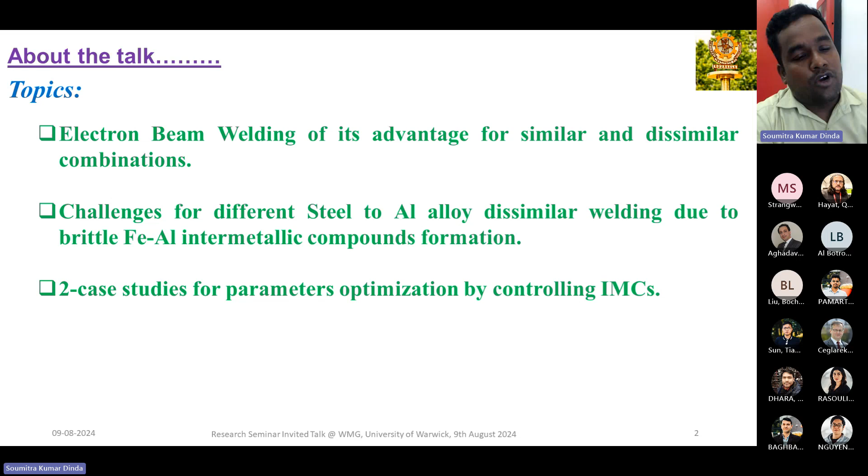Regarding the topic of today's talk, first I will start with electron beam welding fundamentals, its advantages for similar and dissimilar combinations, and the challenges for different steel to aluminum alloy welding. Then we will discuss those challenges in two case studies for optimizing the parameters in terms of controlling the intermetallics, for getting the optimum condition from a mechanical properties point of view.

The agenda of today's presentation is divided into 4 parts. First, I will talk about myself and my present institute, taking around 4 to 5 minutes. Then I will introduce the electron beam welding system with the help of the iron aluminum phase diagram, taking around 10 minutes. Then I will discuss two case studies: first, Fe 7% aluminum alloy to mild steel, and second, DP 600 steel to 5754 aluminum alloy, each taking within 15 minutes.

Regarding me, I am currently associated with the National Institute of Technology, Rourkela, joined as assistant professor in the Department of Metallurgical and Materials Engineering. Before joining here, my whole degree was in Metallurgical and Materials Engineering, starting with my Bachelor of Engineering from Jadavpur University, then Master of Technology from IIT Kharagpur, and PhD from IIT Kharagpur in collaboration with WMG.

My co-supervisor from WMG was Dr. Prakash Srirangam. After finishing my PhD at the end of 2019, around November, I moved to Toronto, Canada, joined as a postdoctoral fellow in the materials engineering department. I stayed there more than 3 years and came back to India at the end of April 2023, joining here as assistant professor at NIT Rourkela.

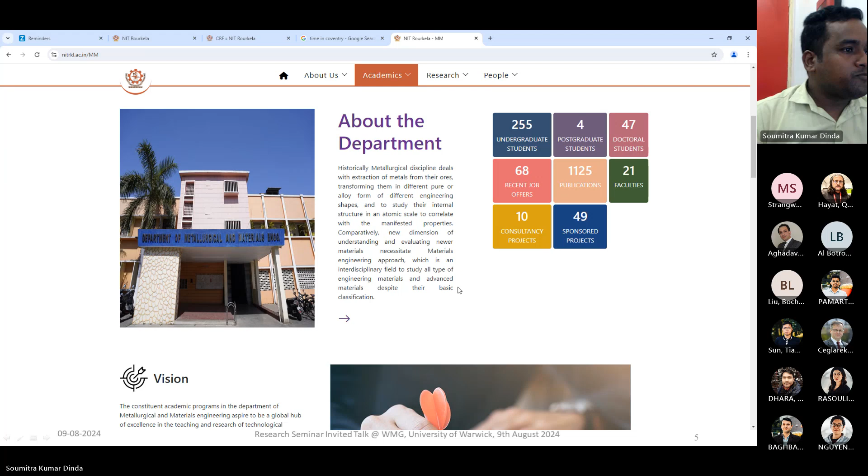With conventional characterization techniques, we also have AFM, EBSD, TEM, confocal microscopy, and secondary ion mass spectroscopy. These things are available as a central resource, meaning anytime we can book a slot and do the experiment.

But if you see our departmental facility, in our metallurgical engineering department we have a lot of experimental and computational facilities in terms of microscopy - confocal, AFM, TEM, and scanning probe microscopes are available. Some of these facilities I am in charge of, or other professors are in charge of in that system.

Suppose the computing facility - I'm in charge because I'm working on the computational or CFD part. So we have ANSYS, MATLAB, Abaqus subscription, and also an HPC system. HPC means high performance computing system.

I have two clusters with a very good configuration of 128 GB RAM with 10 terabytes hard drive, because if you use ANSYS or MATLAB, we need a high configuration computer to do the simulation work

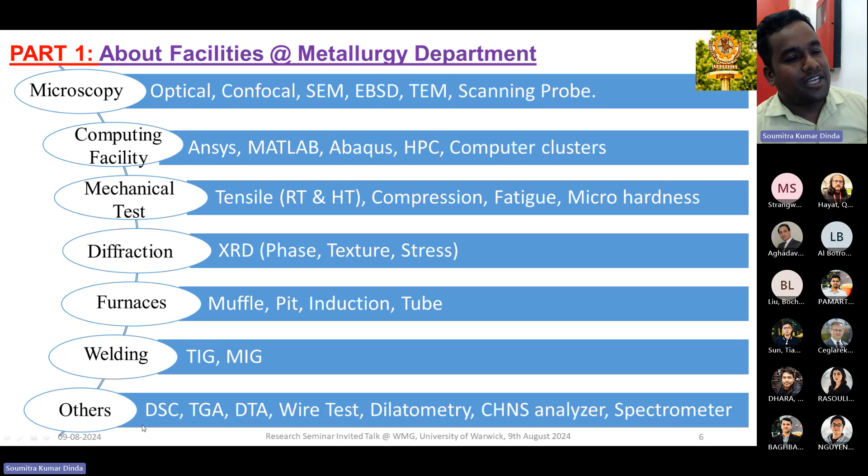That's why I contacted Professor Derek and Professor Pascal so that we can collaboratively do some work - other characterizations like DSC, TGA, DTA, wear test, dilatometry, CHNS analyzer, or spectrometer.

So let's move to part 2. Part 2 is related to our electron beam welding. Before going to electron beam welding, this graph is well known, and I think everybody knows it.

That is heat input versus power density variation among different welding processes. In comparison with gas welding and arc welding processes, the high energy beam density welding like laser beam welding and electron beam welding has quite low heat input, but very high power density.

So that means in case of heat input, the units are near 10 to 100 watts, but in case of power density it's 10 to the power 5 to 10 to the power 7 watts per millimeter square, because the beam diameter is very small, in microns in size.

So this high energy beam density gives very good penetration, very high welding speed we can achieve, and quality weld we can get. But if we put heat input too high, it will damage our workpiece in a much larger area.

So we have two conditions: one is homogeneous microstructure, and another is distorted or damaged microstructure. Definitely, the homogeneous microstructure gives the most accurate mechanical property compared to our disturbed microstructure.

So low heat input with respect to high power density is preferable for any type of welding or any thermomechanical treatment.

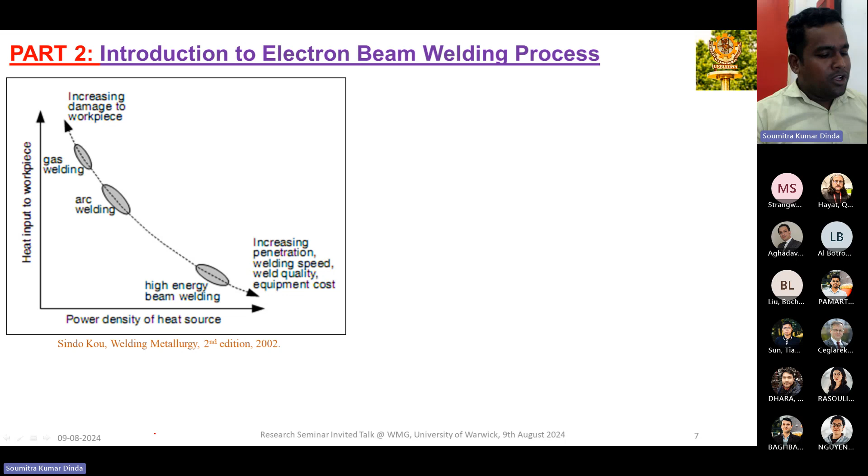Now, I'll try to get your attention - I know most of you are from the laser welding field, so I'm trying to give some credit to myself. Let's compare laser and electron beam welding.

This is a simple schematic of the laser beam welding process and the electron beam welding process. In electron beam welding, the whole operation is performed in a vacuum atmosphere - two types of vacuum are maintained: first the gun vacuum, and second the work chamber vacuum. As we know, the electron is the main item responsible that helps to do the welding, so we have to create or generate electrons.

We can create a potential difference between the cathode and anode, and attract an electron to come to the workpiece at very high velocity to do the melting and welding. We adjust some coils to get a concentrated beam on the workpiece.

We can imagine the work chamber vacuum and the gun vacuum level is 10 to the power minus 5 to 10 to the power minus 6 millibar. In that high vacuum range there will be no atmosphere, so there will be no interaction or reflection between the electron and the atmosphere, and no diffraction. So we can get a higher depth to width ratio, which we will see in the next slide.

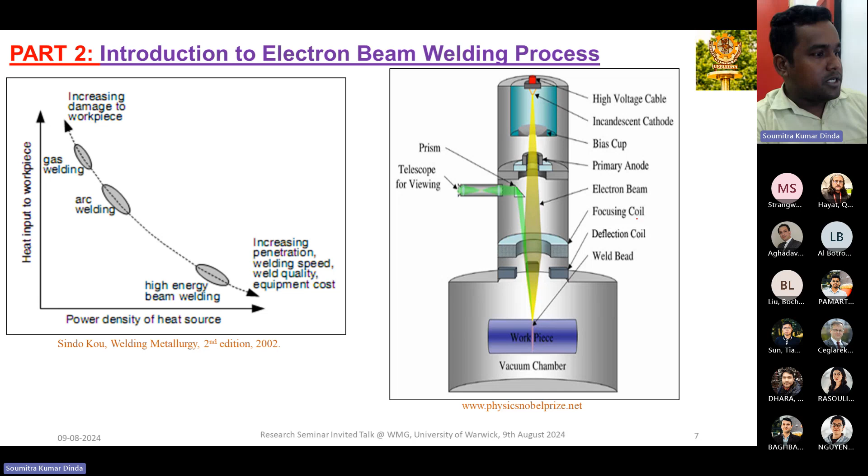That is the fundamentals of electron beam welding that we already discussed. Now let's see the advantages compared to other welding processes. There is a high depth to width ratio.

A very high vacuum we are creating gives a quality weld. So low heat input and very high power density, narrow fusion zone and heat affected zone, because the distorted area will be very small and the beam diameter is very small, at micron level, around 300 to 500 microns.

In this case there's no need of filler material. Also we don't need to make any groove type of geometry. And there is ability to join any type of material with varying thermal conductivity or melting point. Suppose in our case we are doing welding of steel and aluminum.

Think about the melting point difference: for aluminum it's around 600 to 660 degrees Celsius, and for steel it's near about 1500 to 1600 degrees Celsius. So it's a huge difference in melting point, but that can also be welded by this electron beam welding process.

So this is the advantage compared to laser welding, but laser welding also has some key points that you guys know better than me. What I assume is that both laser welding and electron beam welding principles are quite similar. Only the vacuum atmosphere is applicable specifically to the electron beam welding process.

And one more important point or drawback is the small workpiece size. In our academic institute, our electron beam welding machine has movement of the material in the welding chamber of only 200 millimeters in the X direction and 200 millimeters in the Y direction. So you can imagine how small it is - only 200 by 200 millimeters we can weld.

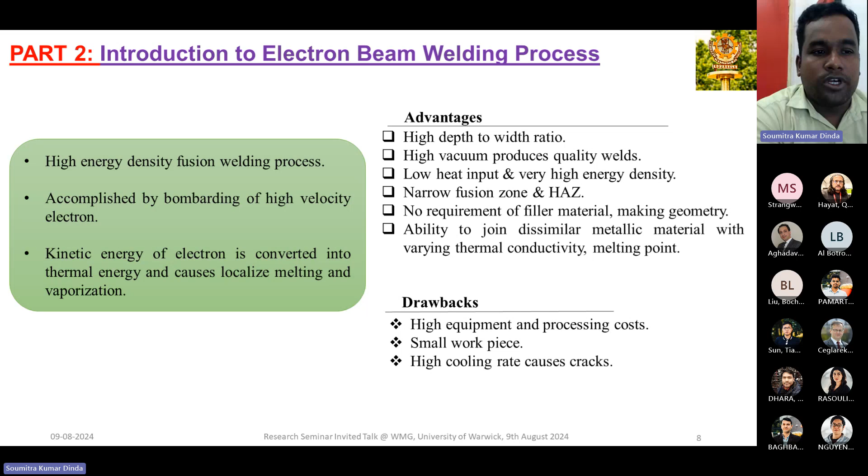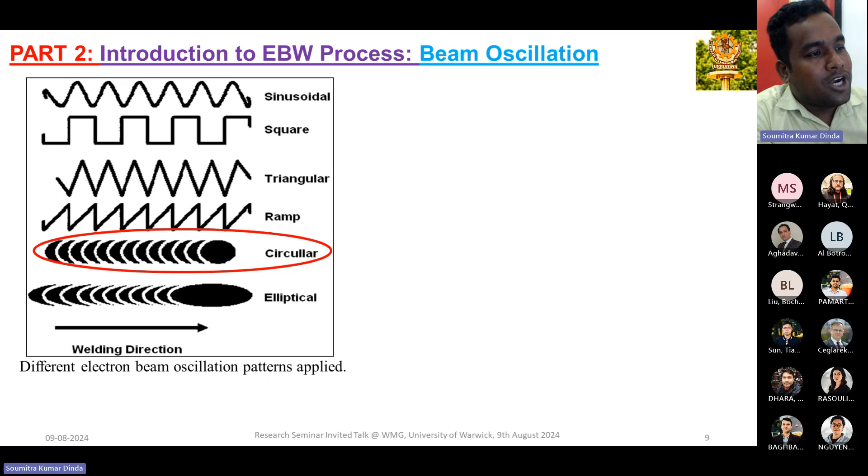Now, along with the conventional welding processing conditions such as voltage, current, and welding speed, we add one more welding condition - beam oscillation. Beam oscillation is the deflection of the electron beam from the straight line path to give a periodic motion. There are different possible oscillating patterns: sinusoidal, square, triangular, ramp, circular, elliptical - different circular patterns we can give. But the literature suggests there is a negligible effect of different pattern types, so we choose the simplest one, the circular oscillating pattern, for our case study.

From the literature, we found that if we use beam oscillation, we will get additional properties compared to the without-oscillation condition, such as a more uniform and smooth microstructure, and reduced porosity and other defects. So for our study, we will justify each and every point, whether all these points match or not.

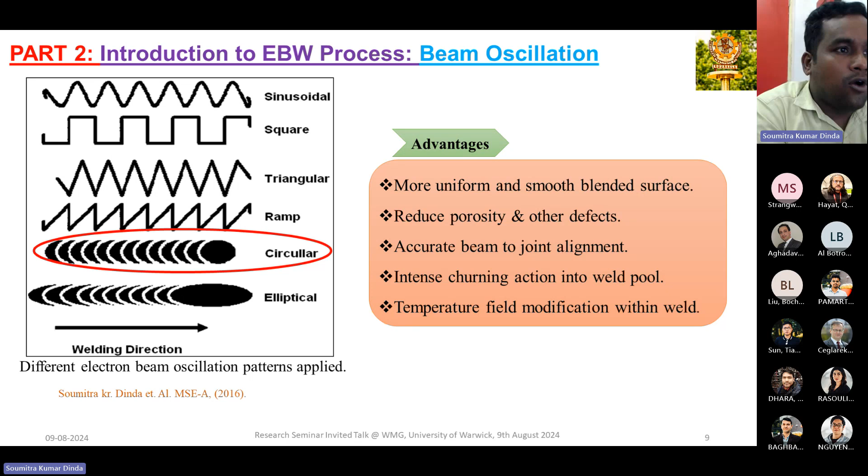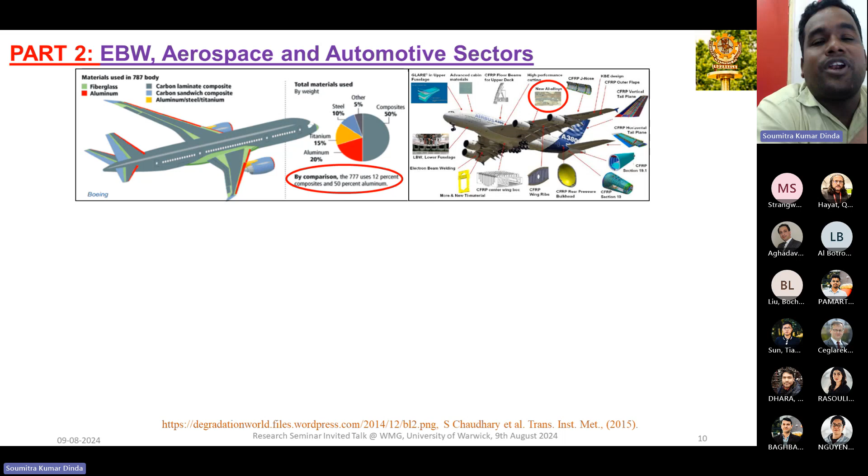Now, our material combination is different steel to aluminum alloy welding. We know that this combination is widely used in different aerospace and automotive sectors. Here are examples from two aerospace industries, Boeing 787 and Airbus 380, where nearly 40 to 50% steel is being replaced by different grades of aluminum. In the automotive sector, examples like Mercedes, Audi, Porsche, Volkswagen show that 40 to 45% aluminum is used to reduce the weight of the body, increasing fuel efficiency and reducing carbon dioxide gas emissions.

By virtue, all this steel replacement with aluminum is only possible through the welding process. I'm not saying it's only possible by electron beam welding, but by different types of welding processes. So welding is the key solution for the partial replacement of steel with different grades of aluminum.

Now the main problem associated with aluminum to steel welding is the phase diagram, because it's a phase diagram of iron and aluminum, and it's not a quite straightforward phase diagram like copper-nickel or copper-zinc, which show complete solid solubility. It's a very complex phase diagram.

So now we can see on the x-axis, aluminum and iron. We can see that nearly 10 to 11% aluminum is soluble in the iron matrix. So if our aluminum addition in steel is less than 10 to 11%, that will give you a solid solution, giving more accurate or better mechanical properties.

But if we add more aluminum, then what will happen? Then there will be chances for different types of compounds to form.

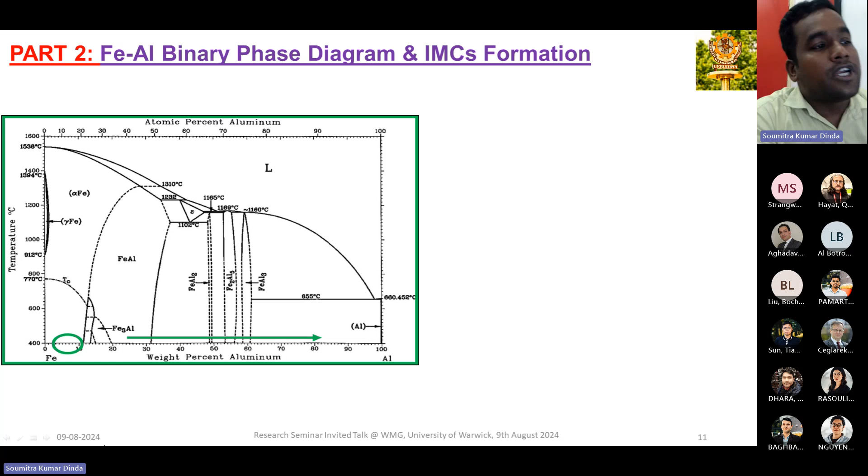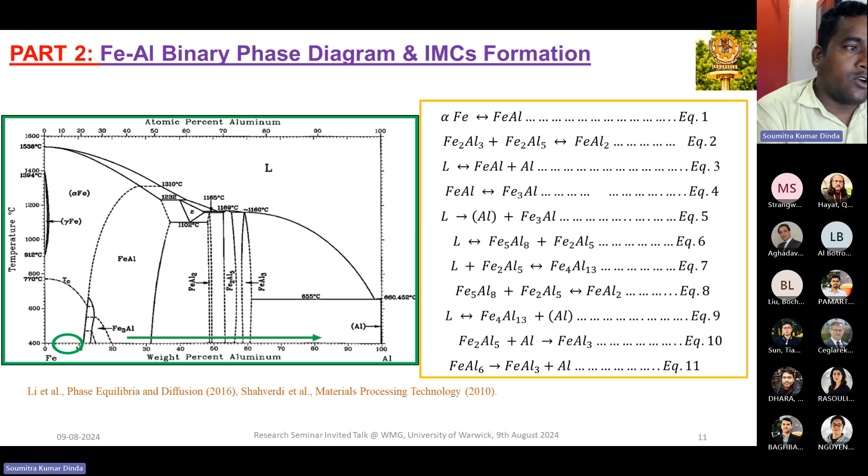Now we can summarize the different types of compounds that form in case of steel to aluminum welding. These compounds are called intermetallics, and they are of different types: FeAl, FeAl2, Fe3Al, FeAl6, and others. This formation only happens due to changes in the weight percentage of aluminum and different levels of temperature or experimental conditions.

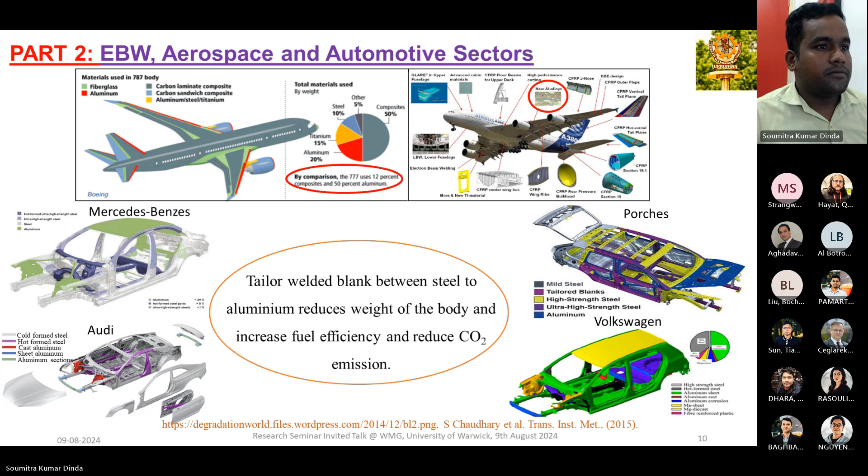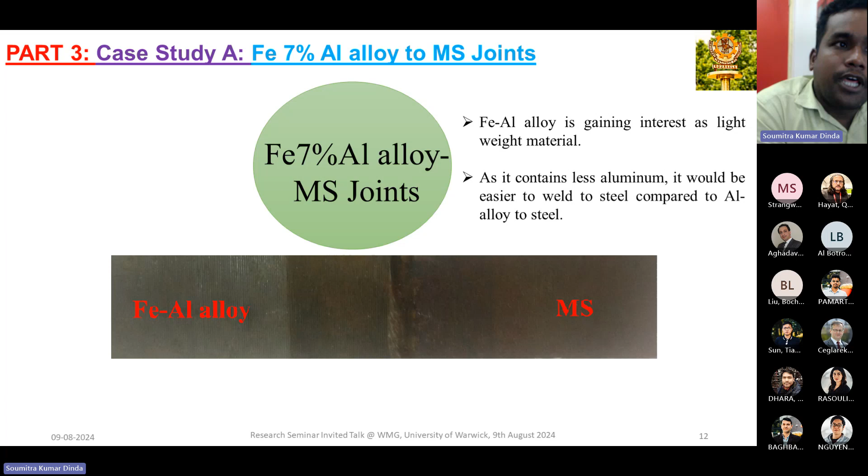Now let's move to our first alloy system, that is Fe 7% aluminum alloy to mild steel. This Fe 7% aluminum we got from Tata Steel Netherlands, and this alloy is gaining interest as a replacement of steel because of its lightweight nature due to the 7% addition of aluminum.

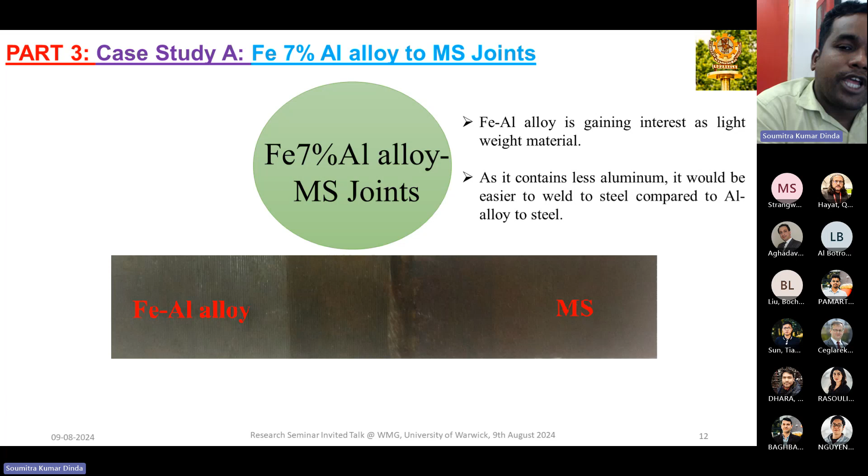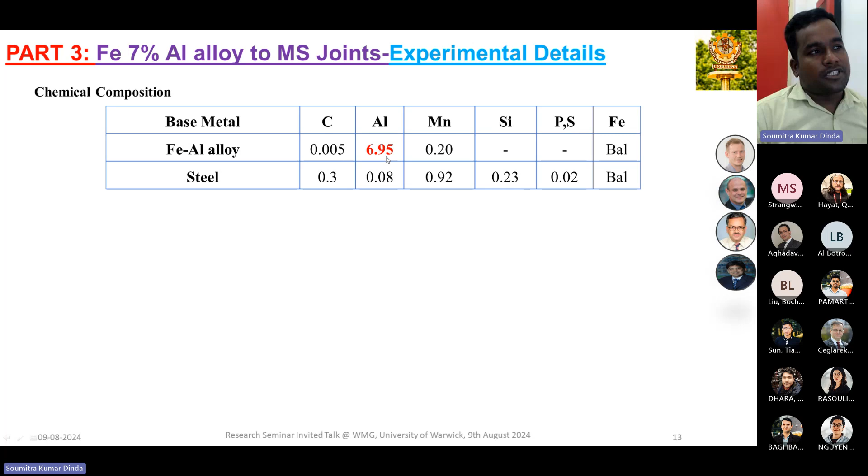As it contains less than 10 to 11% aluminum, it will be easier to weld, and we can overcome or restrict intermetallic formation. In terms of experimental conditions, here is the chemical composition of both materials: the FeAl alloy has aluminum percentage near about 7%, and this is the normal mild steel having carbon percentage maximum 0.3%.

And this is our processing condition. If we try to divide this processing condition into three different ways: constant parameters, varying parameters, and calculated values. The constant parameters are the beam voltage and beam current, which we keep fixed for every condition. The varying beam parameters are the welding speed and the beam oscillation.

The good thing is that if we compare joint 1 and joint 2, the welding speed is fixed, but in joint 2 we are using an oscillating beam of 1 millimeter diameter at 600 hertz frequency. Now if we compare joint 1 and joint 3, we are changing the welding speed, but in both cases we did not use beam oscillation.

We calculate the heat input using V into I, that is voltage into current, divided by the welding speed, and we can see the heat input is quite low, 0.061 kilojoule per millimeter. And the weld width was calculated after taking out the sample from the chamber.

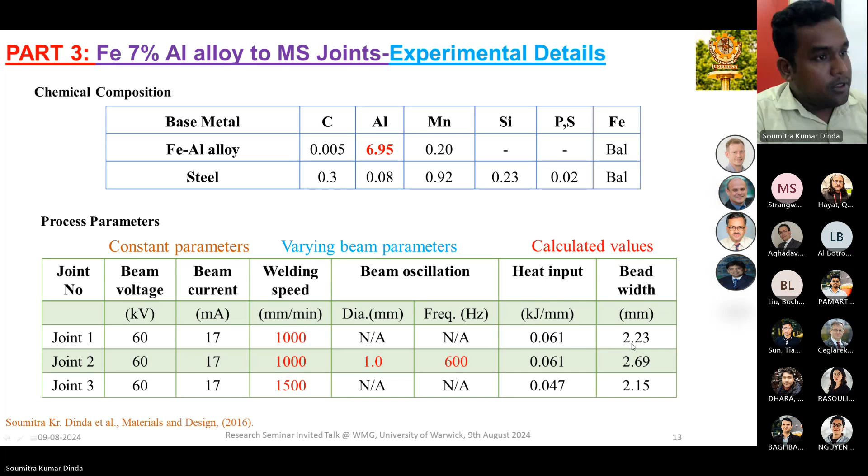So now, in my opinion, if you want to make any welding, or after doing the welding, the first criteria or first observation should be defect characterization before going to any mechanical or metallurgical study.

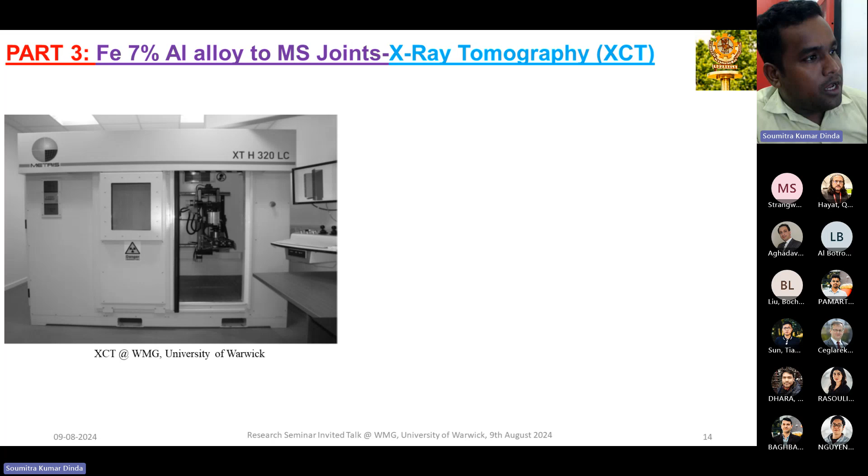And for defect characterization, we first select X-ray tomography. This machine, I think all of you very well know, is from WMG. The working principle of this XCT or tomography is as follows.

Now what we will do is similar to an X-ray. Like if you go to a health clinic to make an X-ray of your hands, say if you broke a bone, they do the same thing. This is 2D, right? So after making a single angle image, we rotate the table 360 degrees so we can get the projection of the image at every angle. Then by reconstructing the 3D object using the back-projection method, we get the 3D volume of our scan image.

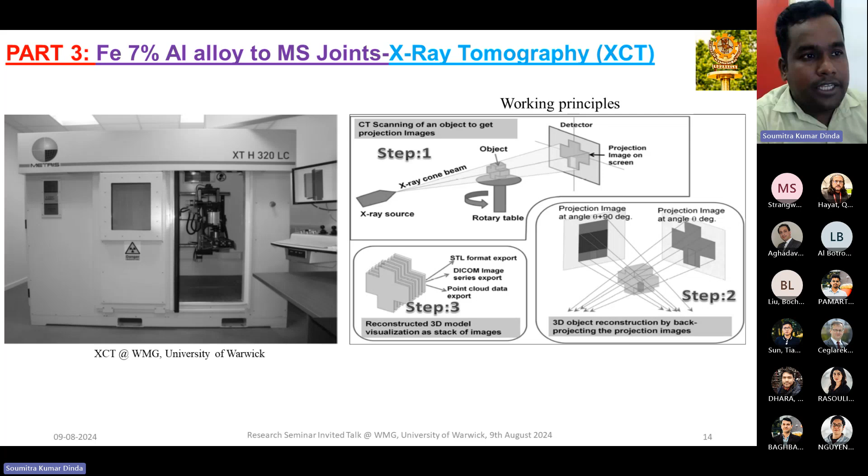As you know, in 2D we only have the X and Y directions. If we want to make 3D, we need the Z direction, and that Z direction we build up through slices, just like cake slices.

Before going to X-ray tomography, we first did X-ray radiography. Using the same machine, we scanned the whole sample, and we can see visible wormhole or lack-of-fusion type defects found in joint 1 and joint 3 respectively.

The wormhole is just like agglomerated or accumulated pores, accumulated in one place. Lack of fusion means lack of penetration, which may be due to high welding speed or other welding conditions that are not appropriate.

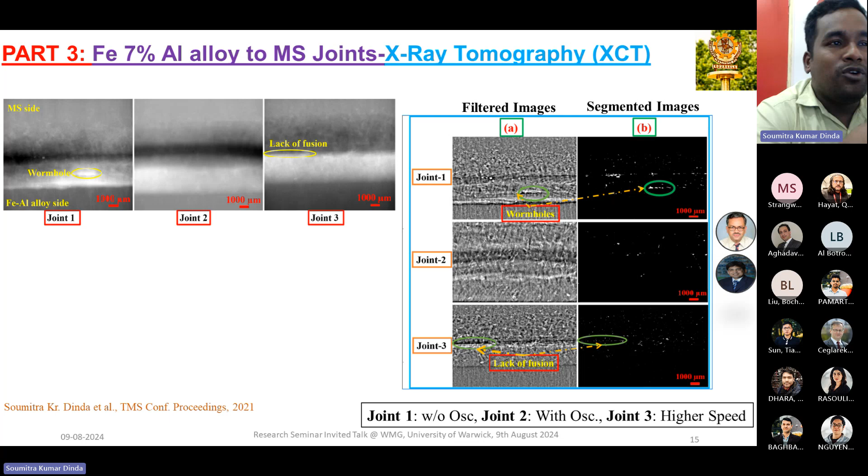So then we did some image analysis using image software. We performed background subtraction, filtered the image, and did thresholding. After segmenting the image, we get a quantified result. But everyone should understand that this image analysis is not good for quantitative data.

But this experiment can help us get the trend of our result. We're not talking about individual parameters like 7.5 or 267 or 269. We can see that from joint 1 to joint 2, using the oscillating beam, the numbers are decreasing if the big sizes are decreasing. We're not asking about the individual number, but in joint 1 to joint 3, the numbers are increasing while the maximum bigger size is decreasing. So we can get a trend before going to the 3D tomography result.

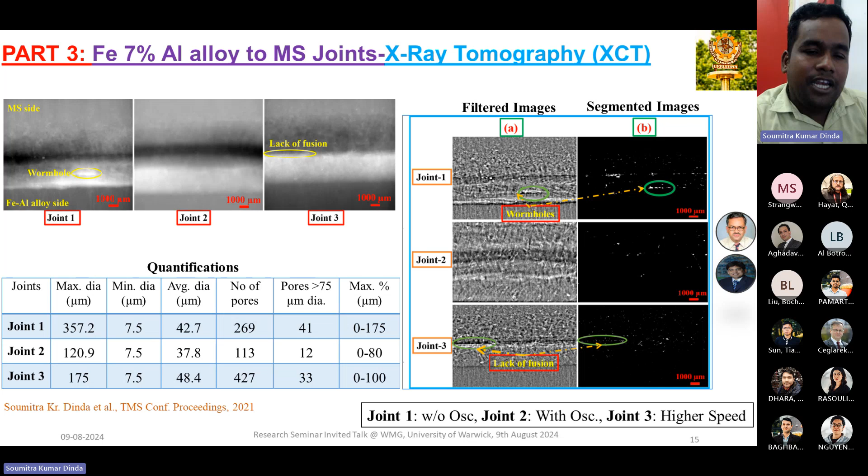So we know that joint 2, using the oscillating beam, gives slightly superior results or superior properties in terms of defects.

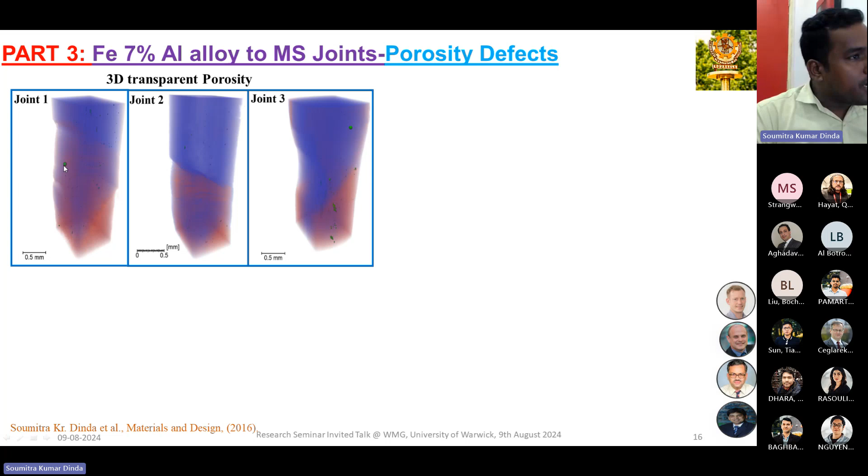Now we did the tomography result, and this is the 3D tomography image. This sample is 1 millimeter by 1 millimeter base with a height of 5 millimeters. The top portion is the Fe-7% aluminum alloy, and the bottom portion is the mild steel, and this green color represents the pores. For closer look and proper visualization, we take the orthogonal slice and we can see the pores.

Now if you see, the pore size difference is very pronounced, and the shape is also different. If we look at the individual pores, the biggest one - in case of joint 1, we see circular or spherical pores, while joint 2 and joint 3 show irregular shaped pores.

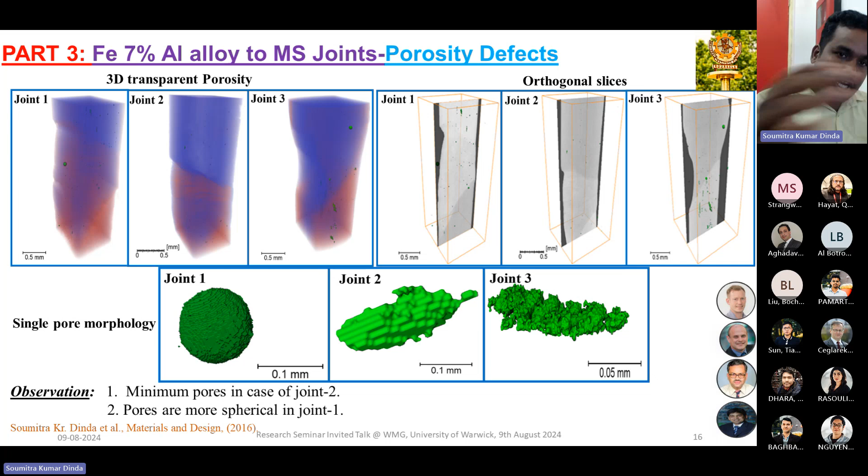We know that in welding or any thermomechanical treatment involving melting, there are two different reasons for porosity formation. The first is gas entrapment or gas involvement, and the second is contraction pores from liquid-to-solid transformation. We know that gas entrapment pores are spherical in nature because of the lower surface energy or interfacial energy of the gas.

We can also justify this with the help of sphericity calculation. Sphericity close to 1 means the X and Y direction ratio is close to 1, meaning perfectly spherical. We find that in joint 1, the sphericity close to 1 is maximum, but in joint 3, the sphericity is far from unity. So that means the gaseous pore formation trend is more prominent in joint 1.

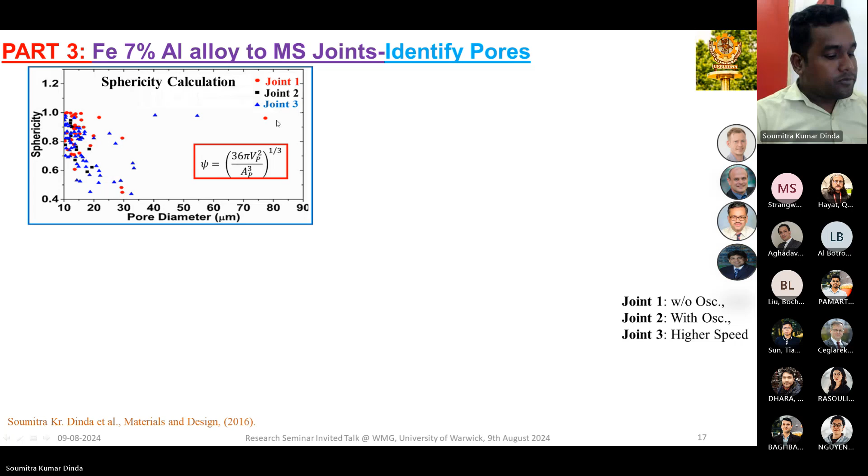And now if you try to look at what will be the reason for gaseous pore formation, or which type of gas is involved, we did the Raman spectroscopy study.

With advanced Raman study, I'm not an expert, but what I know is the laser source will go through the material throughout the thickness, and if there is any discontinuity, it will show a shift or peak. That is called the Raman shift.

From the literature, we found hydrogen is responsible for the gaseous pore formation. Then the question comes, why, from where does this hydrogen gas come, because we are doing welding at a very high vacuum?

This hydrogen may come from within the material during the casting process. Otherwise, maybe when we are mechanically putting the material together before putting it into our vacuum system, some gas pocket or air pocket may enter within it. So we found only hydrogen gas is there, responsible for the gaseous pore formation.

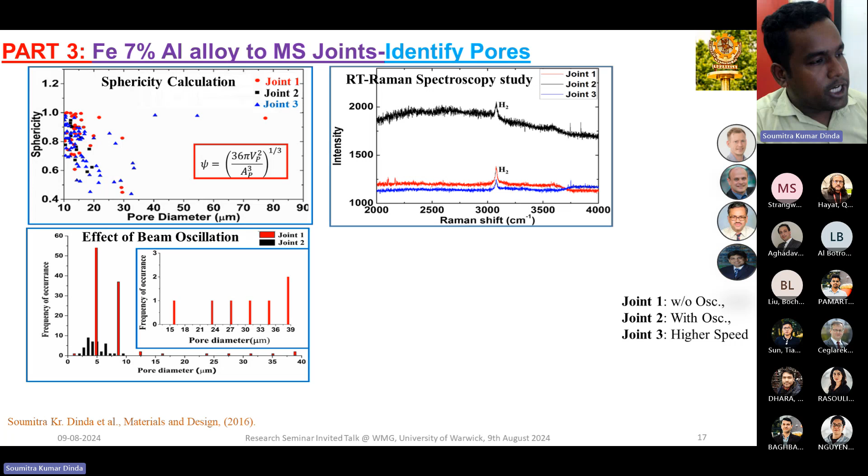Then we do the quantitative study. First, see the effect of beam oscillation. If we compare joint 1 and joint 2, we see the beam oscillation effect, and in case of joint 2, we did not find any bigger size pore, meaning the pores are very small in range.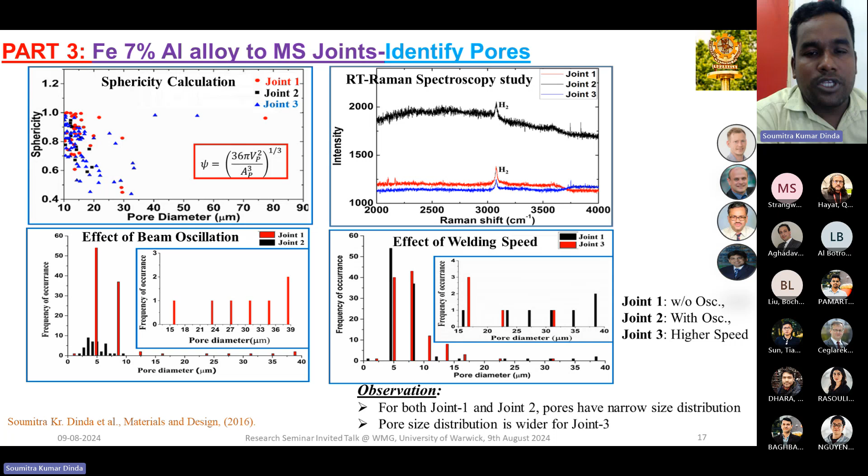So from the porosity or defect point of view, we can say that joint 2 is the topmost position, then joint 1, and then joint 3.

And then we move to the mechanical properties. We have the defect background, then we do the mechanical property, meaning we did the micro hardness. In case of micro hardness, we just see the hardness difference of the HAZ region because of the grain size change from the weld zone to the base metal side.

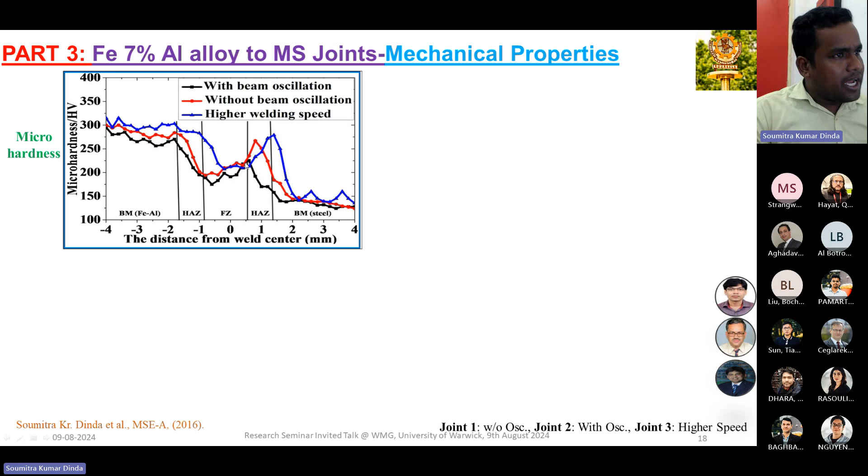That's why your hardness is changing. But in other cases, we see a similar trend of hardness for all three conditions.

But see the strain, meaning the elongation. Elongation is very less, only 2.5, where it's near about 12%. This is the contrast in property.

Now if you try to compare all three joint conditions, joint 1, 2, and 3, we can see that YS, the yield stress, and UTS, the ultimate tensile stress, are not changing that much. It's quite similar, but check the elongation.

In case of joint 2, we got the elongation near about 13%, compared to 9.6% for joint 1, or joint 3 at 2.8%, the lowest one. So in case of joint 2, we are getting the maximum elongation, very close to our steel base metal.

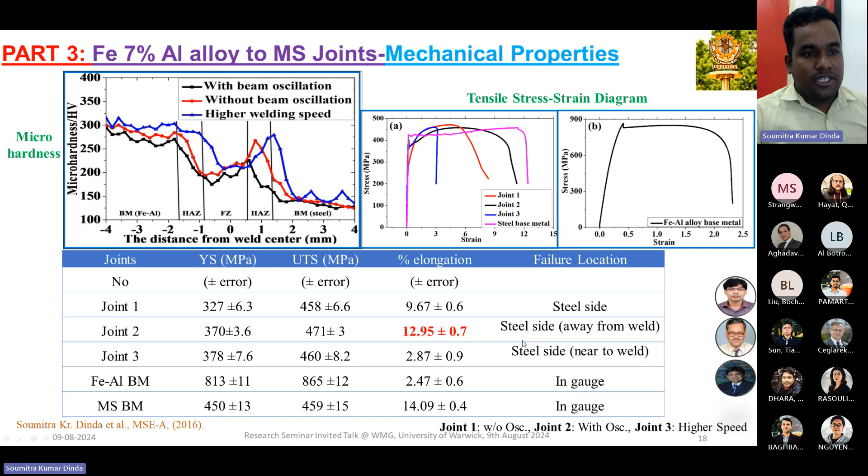And see where these samples break. It's not even in the HAZ, not even in the fusion region. Now if you see the image of this tensile broken sample, this is my whole gauge length, and this is my fusion area. The sample breaks far away from the fusion zone, meaning our weld joint is strong enough, or more stronger than our base metal.

Then we did the fractograph study, the SEM fractograph, to know which type of fracture surface is coming. In case of joint 3, we saw a brittle mode of fracture. But in case of joint 1 and joint 2, we found a cup type of fracture, or dimple type of fracture, which is also the ductile mode of fracture.

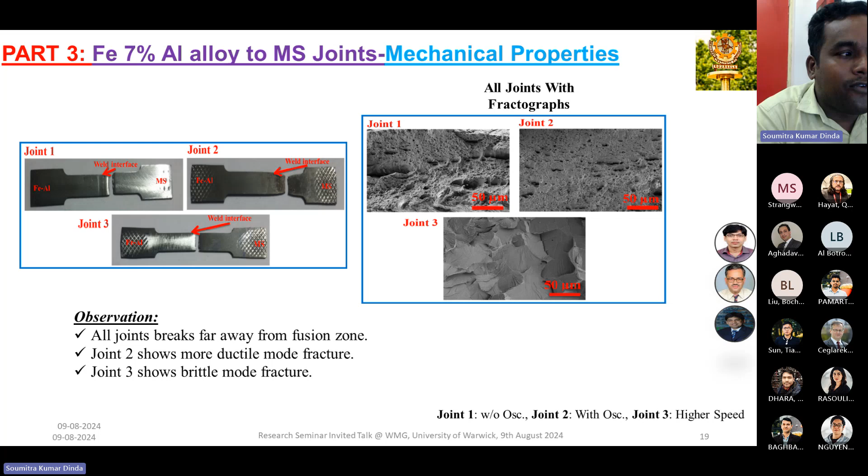And then we go for the impact study, the impact load, that is the Charpy impact study. And for that, we see that in case of joint 2, we get the maximum impact energy compared to joint 1, and the minimum for joint 3.

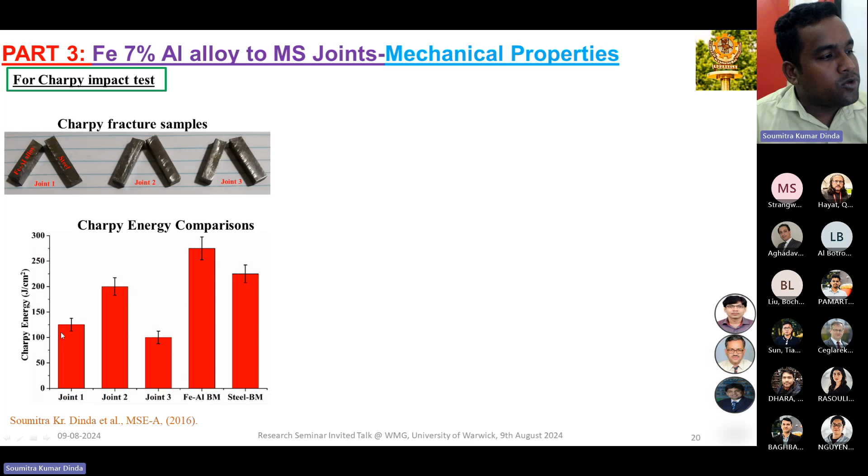And then again, we did the fractograph study. So in case of joint 3... joint 1 and joint 2 show dimple type of fracture, but in case of joint 3, we saw quasi cleavage, that means towards the brittle mode of fracture.

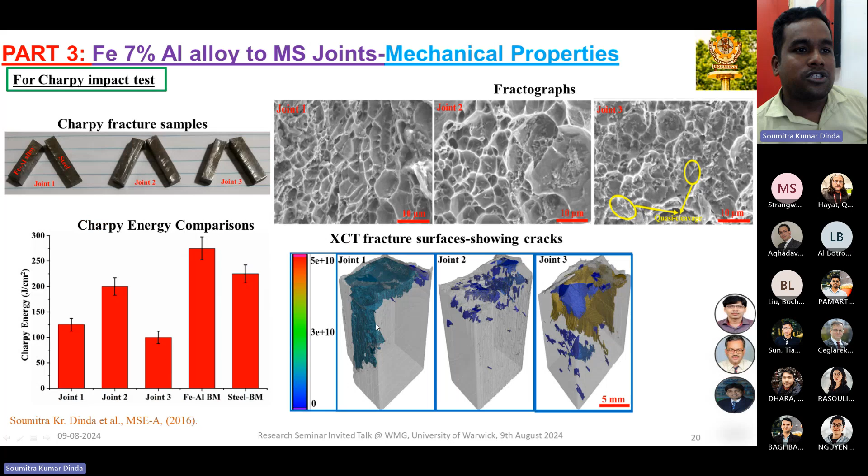We are taking the Fe 7% aluminum alloy side to see how the cracks look like. So in case of joint 2, we see very small size cracks, but in case of joint 1 or joint 3, we see the cracks are very big and interconnected to each other. That's why we see the color coding, and that's why we got the very big size cracks.

So we know the mechanical property or the performance of the joint. So to discuss the effect on mechanical properties or performance, we need to study the microstructure.

So iron, carbon and aluminum are the major alloying elements in both cases. That's why we get the worst mechanical property, because of the poor distribution of the alloying element throughout the fusion region for joint 3.

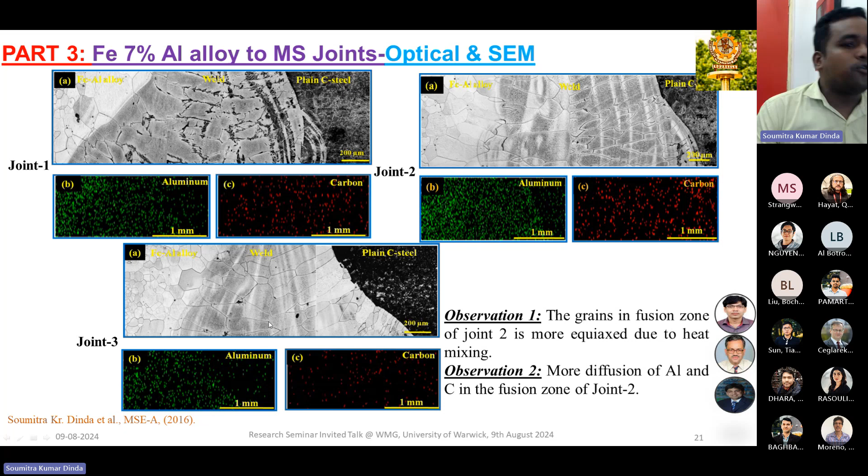And then we go for the textural study using SEM for EBSD. This EBSD texture is called micro texture, because the SEM beam can penetrate up to 10 to 20 micron depth from the surface, and this textural study is the study of that 10 to 15-20 micron. So this is the Fe-Al side, and this is the mild steel.

And this is the last one. This is the inverse pole figure showing 001, 101, and 111. So this color coding will help us understand which type of grains are oriented along which direction.

Both mild steel and Fe-Al are BCC in nature. We can see that in case of joint 1, all three grains are oriented in three directions, we will see for different grains, but the majority of the grains for joint 1 are oriented along the 101 and 001 direction, parallel to normal direction.

In joint 2, we get the 111 and 101 orientation. So in case of BCC microstructure or crystal, if our grains are oriented more along 111 or 101 direction, then it will give more mechanical property before going to fracture.

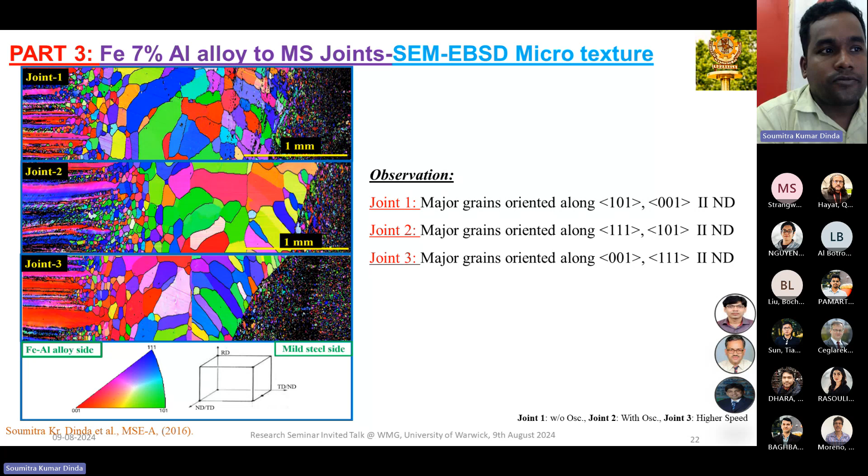So we know the microstructure and microtexture, but suppose our welding material thickness is 4 to 5 millimeter or 10 millimeter, this microtexture will not replicate the total mechanical properties which we are getting. So for that, we did the neutron diffraction study for the bulk texture.

For this study, our material thickness is 5 millimeter. We can see that the neutron beam is 5 into 15, and the neutron wavelength we use is 0.2 to 3.5 angstrom. And this experiment we performed at RAL, Rutherford Appleton Laboratory, in UK.

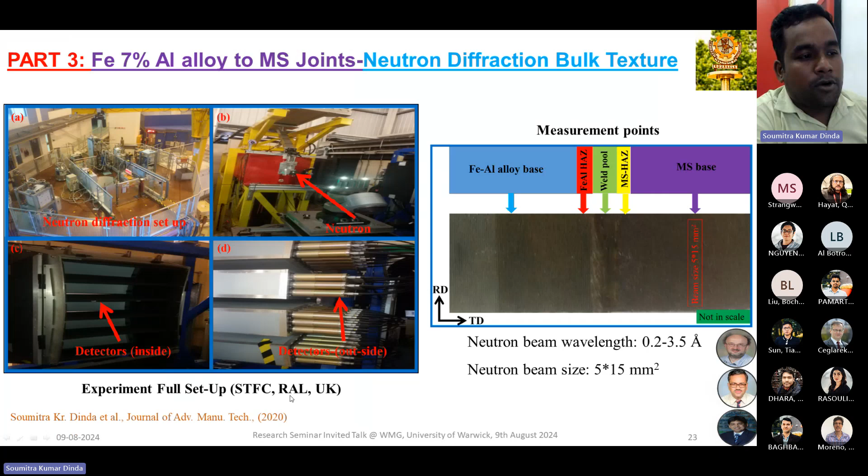And for this test, macro texture we discuss with the help of ODF, that is the orientation distribution function. This can also be discussed with the help of the inverse pole figure or pole figure, but ODF distribution gives you the complete idea of which type of texture or fiber deformation we are getting for different conditions.

The first left hand side is for the base metal, the lower left hand side is for the HAZ, both HAZs, and the right hand side is for the fusion zone. The top portion is the Fe-Al and bottom portion is the steel.

And this structure will help determine which type of fiber components are present in which position. And for the BCC, because both are BCC in nature, here phi 1 should be 0 to 90, and phi will be 0 to 90, at phi 2 at 45 degree.

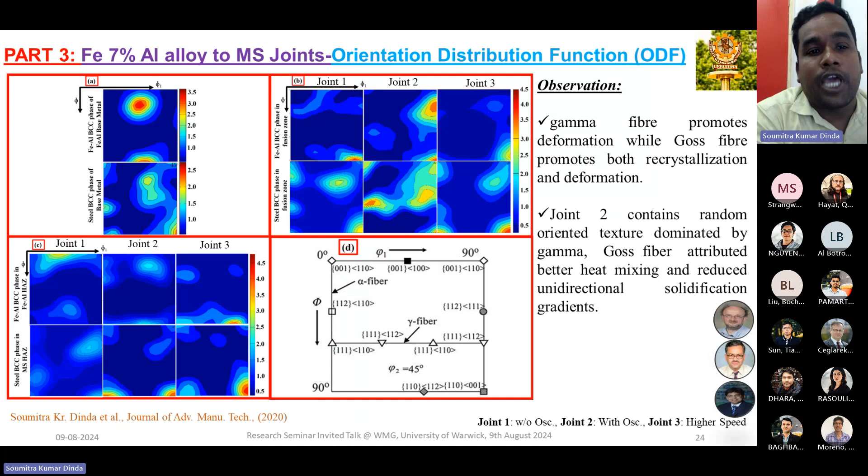So then the question comes: what happens if you use an oscillating beam, or beam oscillation? That will change the grain geometry, grain morphology, grain direction, everything. We can discuss this with the help of concepts proposed by these authors in 2016.

On the left hand side is without oscillating beam, that means the normal beam, with a specific beam diameter. When the beam moves in a forward direction, the weld bead will form as an overlapping of small weld beads. Since liquid and solid phases are both present, Marangoni flow will act strongly, and for most materials, Marangoni flow direction acts outward. As our torch, electric torch, or laser torch moves forward, solidification takes place towards the front direction.

But if we use an oscillating beam, this is the beam oscillation path. For the same length, the beam travels a longer distance, so individually it forms a small tiny weld pool, and there will also be some overlapping. But when the beam moves to this side again, it melts again - that means repeated melting takes place. This gives a churning action, and repeated melting and solidification dictates the overall cooling rate, so our microstructure changes due to the oscillating beam.

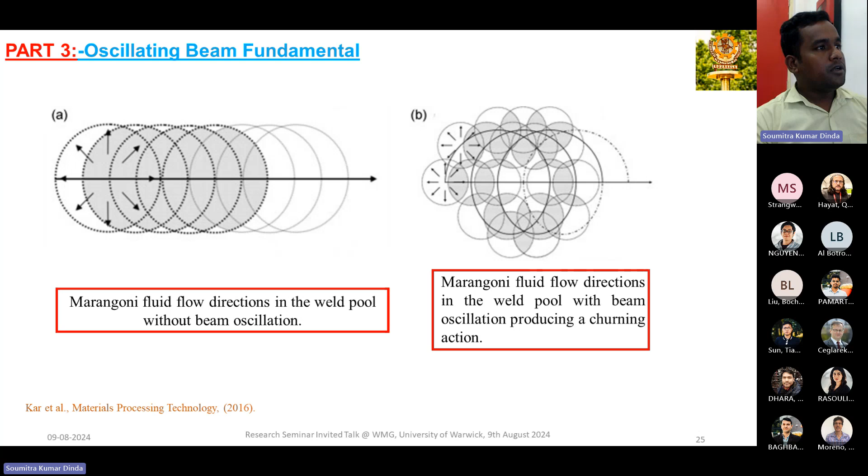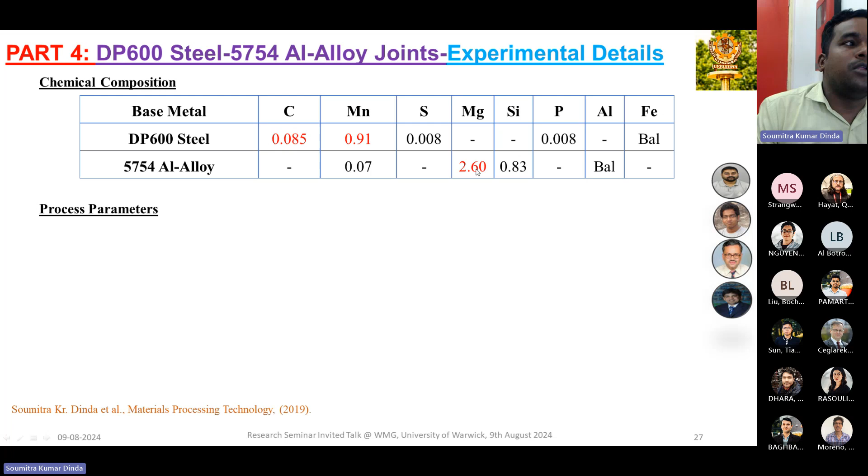So now let's move to part 4, the second set of material: DP600 steel to 5754 aluminum alloy. This is the chemical composition of our material, where DP steel means the microstructure is ferrite and martensite, with ferrite as the matrix. The 5754 aluminum has a pancake type microstructure, and since this is the 5000 series, the major alloying element is magnesium.

In terms of process parameters, again we divide into 3: constant beam parameter, varying beam parameter, and the calculated value. From the previous example, we learned that oscillating beam gives superior properties compared to welding speed or non-oscillating beam. So now we remove the higher welding speed condition.

Now we changed the oscillating diameter from 1 mm to 2 mm. From the literature, we found that oscillation frequency has minimal or negligible effect - changing from 300 to 600 does not change the mechanical or microstructural properties much. But the oscillation diameter, from 1 millimeter to 2 millimeter, plays an important role for microstructure and mechanical properties. Here we also increased beam current slightly, within 1-2%, to get proper full penetration.

We again calculate the heat input. If we compare joints 1, 2, and 3: joint 1 is without oscillation, joint 2 is the 1 millimeter oscillation diameter, and joint 3 is the 2 millimeter oscillation diameter.

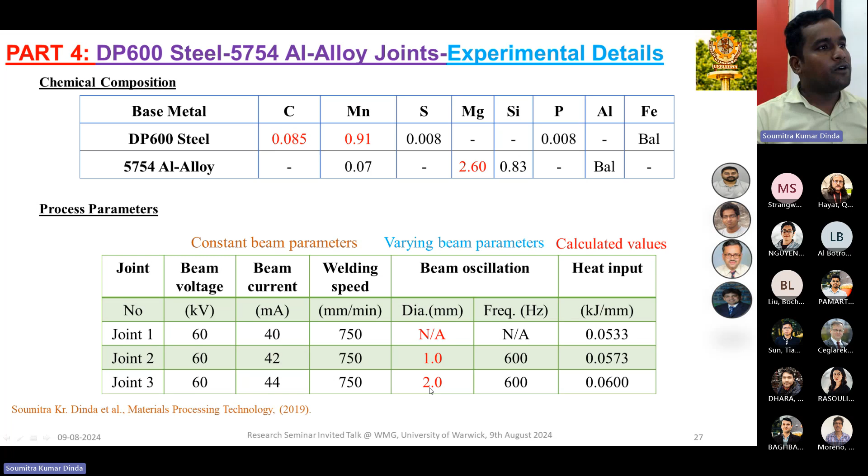Now let's see similarly we did the porosity defects. Again we find the top portion is the DP steel and the bottom portion is the aluminum alloy. We found that porosity is formed, and the aluminum alloy side shows porosity formed extensively compared to the steel joint.

This is because when doing welding for this set of materials, we did not pass our electron beam at the junction point. We offset the beam towards the aluminum side by 1.5 millimeters to melt the aluminum and restrict the steel melting, so that we can restrict the intermetallics formation. We did this based on literature study, some experience, and trial and error method.

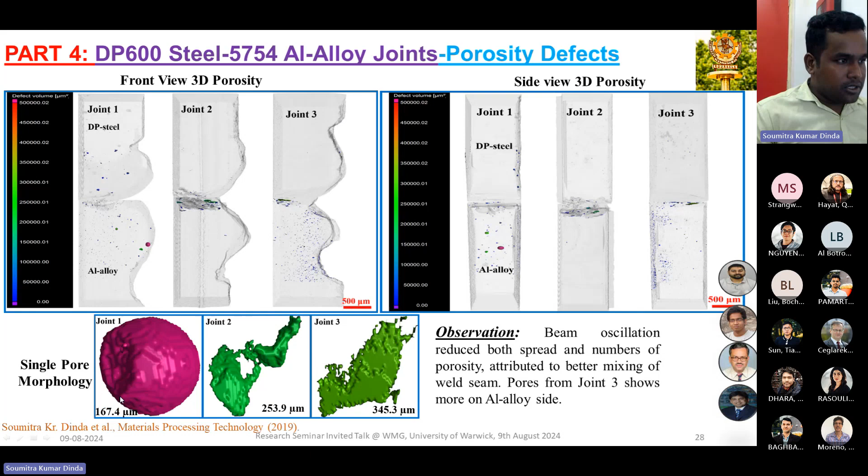And this is the individual pore geometry. We saw that there are spherical pores, and joint 2 and joint 3 show irregular shape pores.

Now, very interestingly, we did the Raman spectroscopy for gas analysis. But in this case we did not find only hydrogen, we also found oxygen and nitrogen, and we found the peak for all three cases. So we can say that the gas porosity formation is controlled by all three gases.

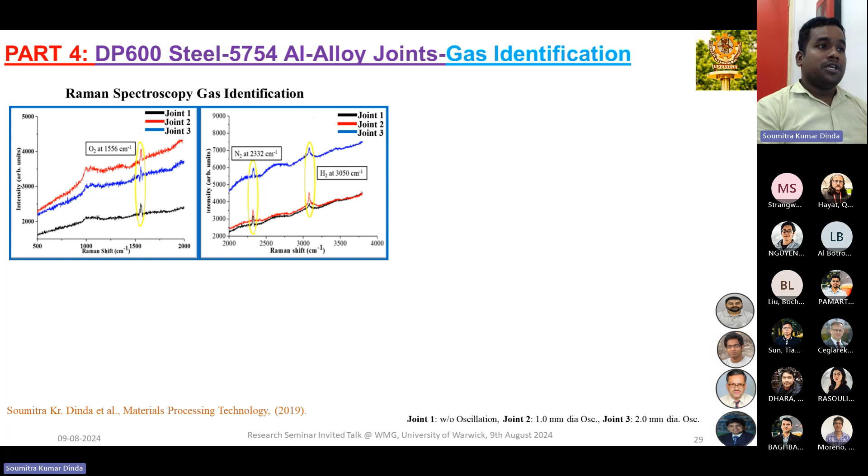But because there are three gases, we then quantified these gases. The total gas present is maximum for joint 1, at the 343 ppm level, while joint 2 and joint 3 are the lowest, around 122 ppm.

That means if we also use the oscillating beam, we are releasing more gas. This is because of the fundamentals - remember in the last slide I discussed that repeated melting and solidification and the churning action give a wider window for the liquid material, so that the gas will move out from the liquid metal region.

So then we tried to find out any other defects, and we did first a room temperature XRD study. Here copper is the target material, with a wavelength of 1.54 angstrom, and we found only very big iron and aluminum peaks.

But when we tried indexing it, we found different intermetallic peaks, and these intermetallic peaks are 4 types: Fe4Al13, Fe6Al, FeAl, and Fe3Al. We did not observe any individual small peaks because these base metal peaks are so strong compared to our intermetallic peaks.

But we did the Rietveld analysis to get quantified data, and we found the total intermetallics first decreasing for joint 2 and then increasing again.

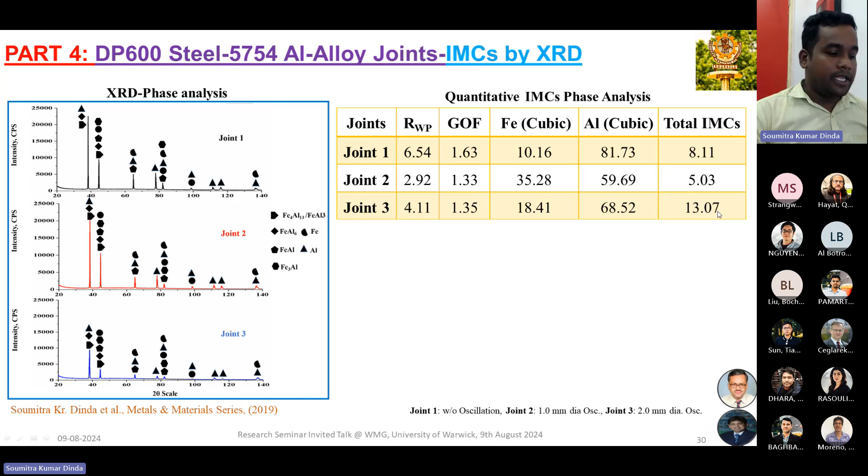And what are the different types? These are the four different types of intermetallics: Fe3Al, Fe4Al13, FeAl, and Fe6Al. We got the individual amount or percentage of intermetallics formed for different welding conditions or different joints. But this room temperature XRD does not give us a proper peak showing any individual peak clearly.

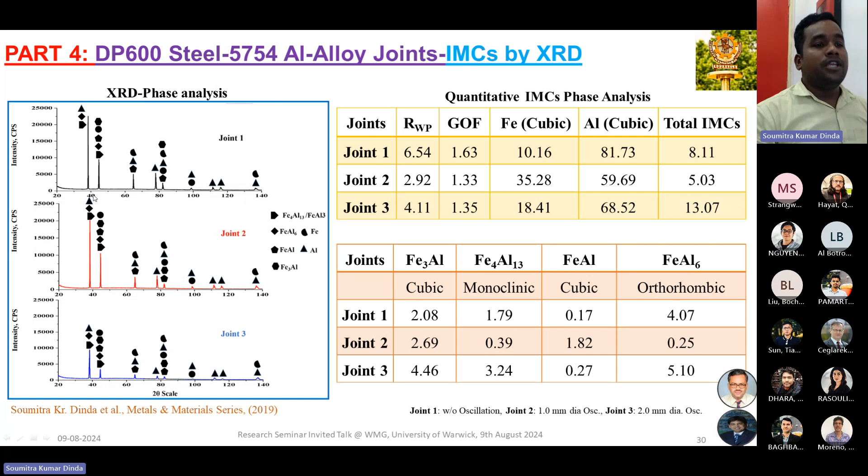For that, we did a synchrotron diffraction study. In case of normal XRD, the target material wavelength is 1.54 angstrom, but in case of synchrotron diffraction, the wavelength is 0.7843 angstrom. This is a synchrotron graph, and here we only saw the iron and aluminum peaks.

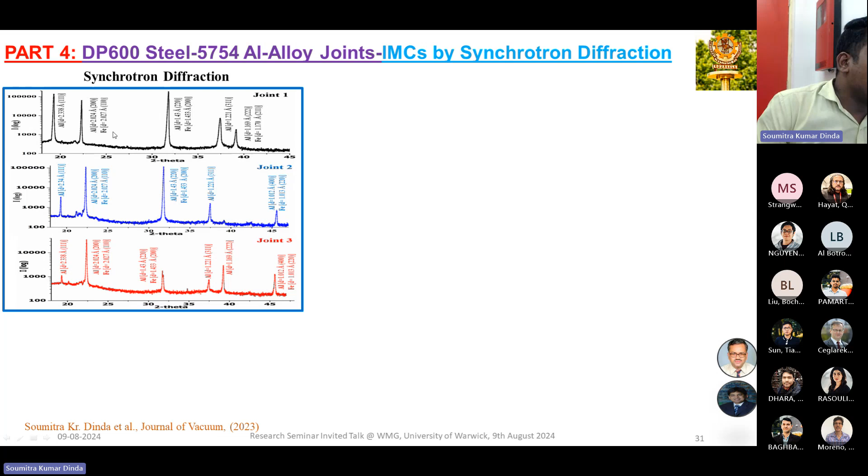But at the small portion here, you see some small peaks. What we did then was scan the sample in the small 2 theta region, that is 19.5 to 22.5, and we got the intermetallic peaks individually.

Then again we did a Rietveld study, and found the same 4 types of intermetallics, but the percentage values are a little different. In previous cases you had 8, 5, and 13; here we got 10, 7, and 14. So it's close, but we assume for this synchrotron diffraction, because we are scanning a very small region, it will give a more accurate result showing the individual intermetallic peaks.

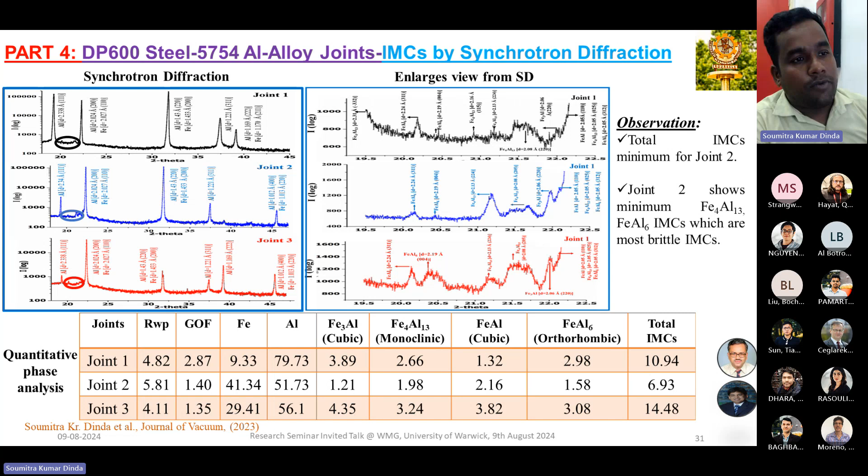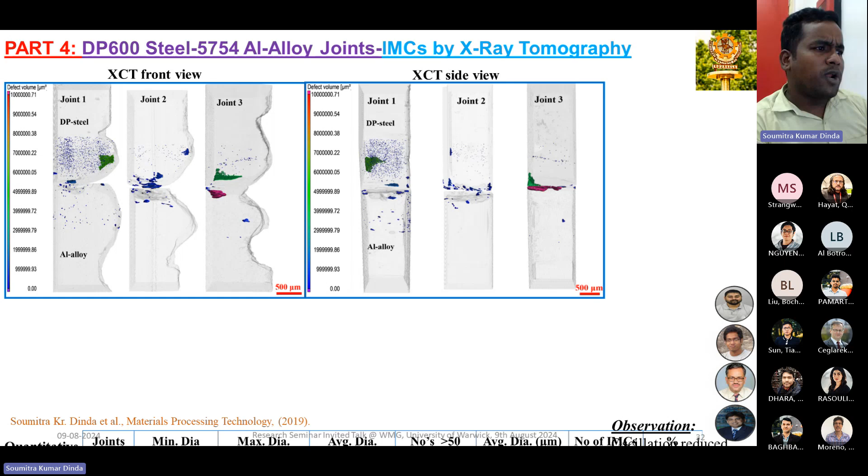So here we found both the porosity and intermetallic defects in our DP600 to 5754 aluminum alloy joint. Then what we did next was go for the visualization of intermetallics, just like the porosity. So with the same sample, we did the tomography study for the porosity defects and for the intermetallic defects.

And where we see again the same thing, that means the intermetallics are formed, but there are different ranges. You can see the scale of the volume in micron cube, and see the quantitative result.

Now we see the total scan area. What is the percentage value of the intermetallics formed? For joint 1, it's showing 0.24%, but in case of joint 2, it's 0.13. That means by oscillating the beam, it goes to half. But if you increase the oscillation beam from 1 millimeter to 2 millimeter, it goes to double, to 0.24 to 0.48.

So it does not mean that if you use the oscillating beam, we are getting superior property. That means we have to optimize the beam diameter also.

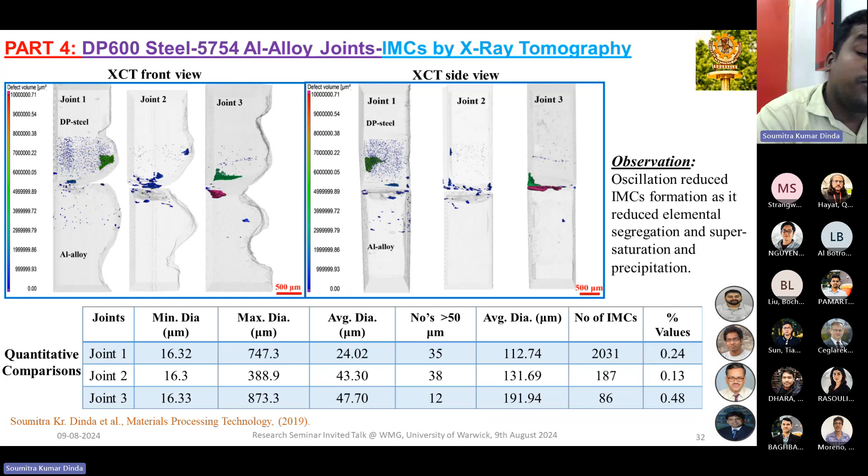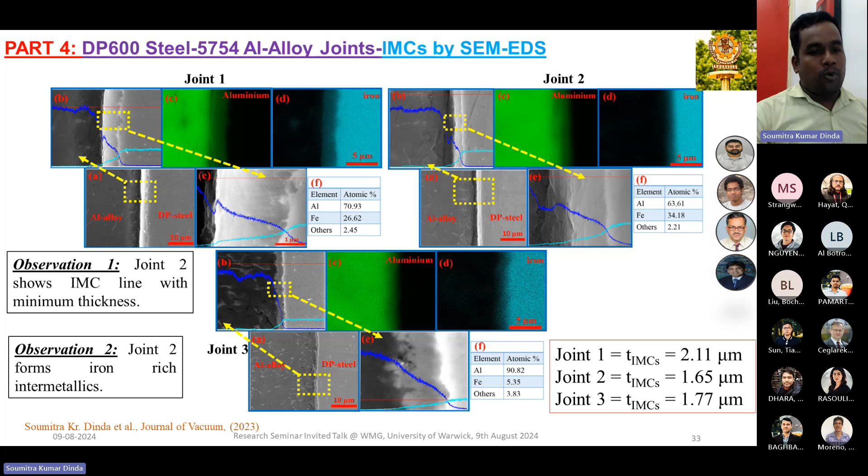That means in case of joint 3, instead of getting superior property, we are getting worse property from a defect point of view. Then we did TEM for intermetallic visualization, that is transmission electron microscopy.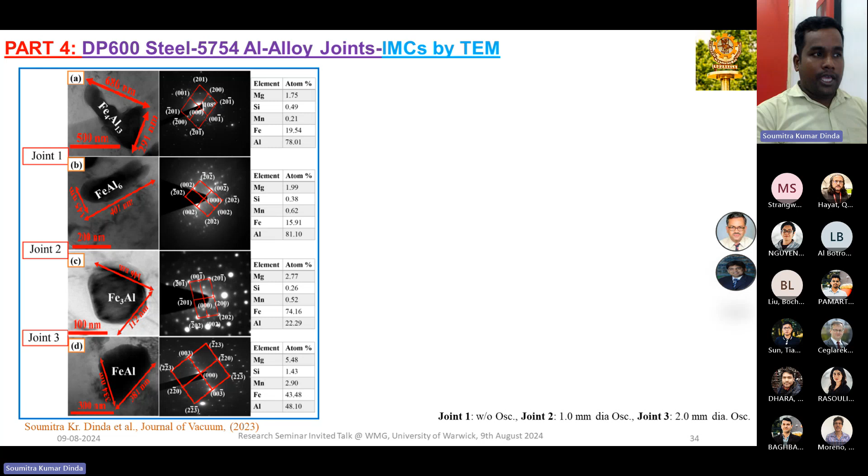So similarly we did for all cases, and we found that all 4 compounds, Fe4Al13, FeAl6, Fe3Al, and FeAl, are found in all cases. But the interesting thing is for joint 3.

In case of joint 3, we got some bigger size, irregular particles. Suppose this is the needle type of shape, and see the unit, 1 micron. This is more than 4 micron, and this is in nanometer. So this is a needle shape, hexagonal shape.

Also, we can see the cluster, or the garland type of intermetallic form, in case of joint 3. We did the EDAX study and the SAD pattern study, and we found out this type of intermetallics are Fe4Al13 type.

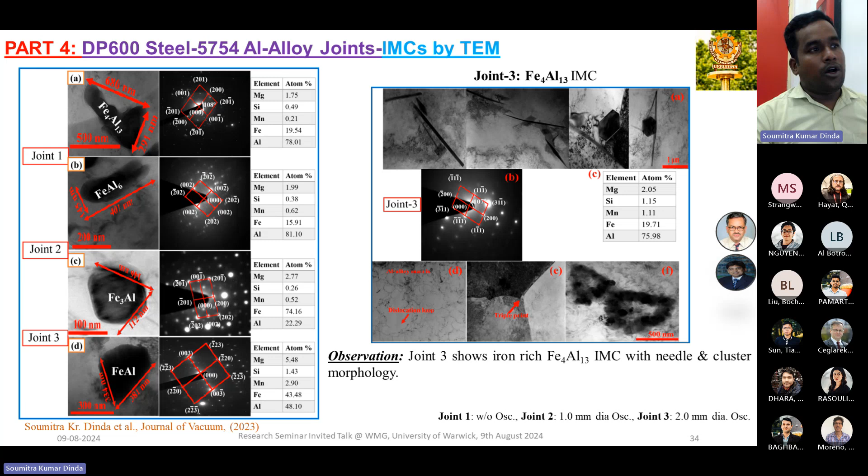Our literature suggests that aluminum bearing intermetallics are more brittle compared to iron bearing intermetallics. Just like this one, this is the aluminum bearing intermetallics. That is the reason we are getting very poor mechanical property for joint 3.

Now, for any joint, performance mainly depends first on defect studies, that is the porosity and intermetallics. And the second thing is the residual stress distribution. Residual stress is also one type of defect, formed due to the thermomechanical treatment or welding.

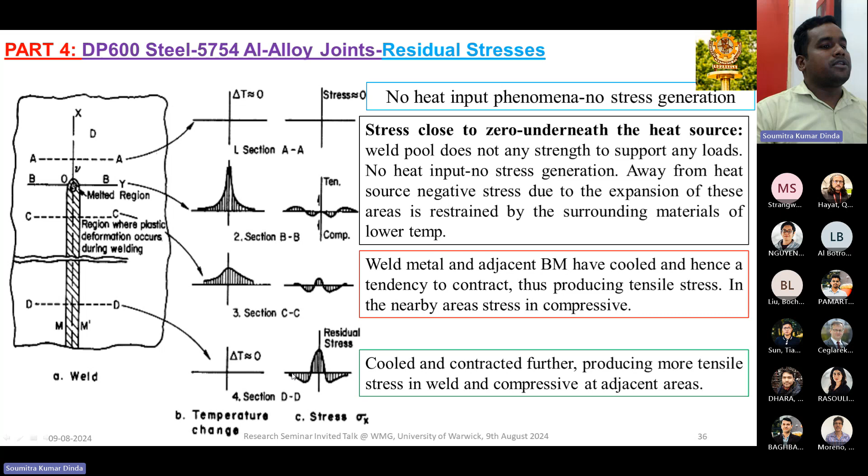When we finish our welding, there is no temperature difference, but our residual stress graph looks like this. This is the type of graph we also got from our study.

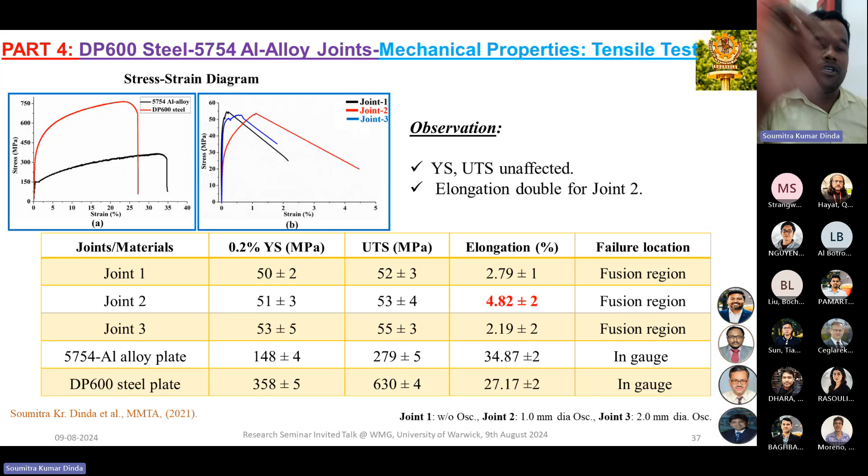Check the failure location: all joints failed at the fusion region, not like the previous condition where joints failed outside the gauge length area. This is because of the formation of intermetallics.

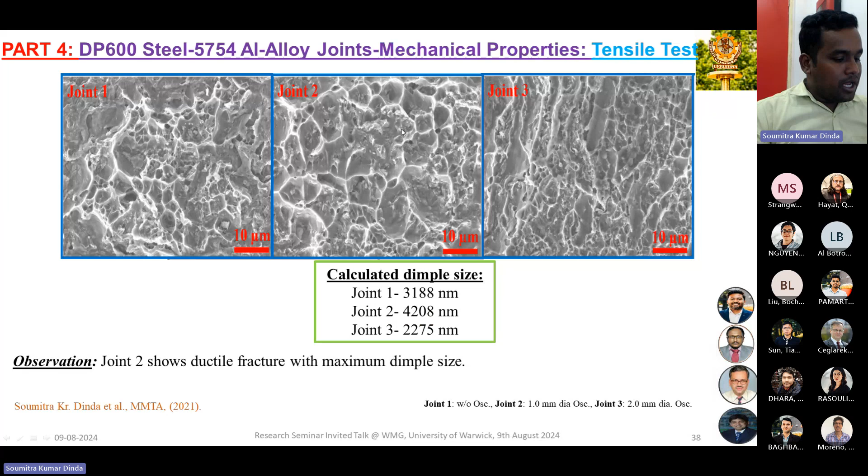So we did the fractography study and calculated the dimple size. As you know, if the average dimple size is big enough, that means the chances of ductile mode fracture are more. In case of joint 3, we got the lowest dimple size, 2275 nanometers, and the highest for joint 2. That's why joint 2 gives the maximum elongation percentage before fracture.

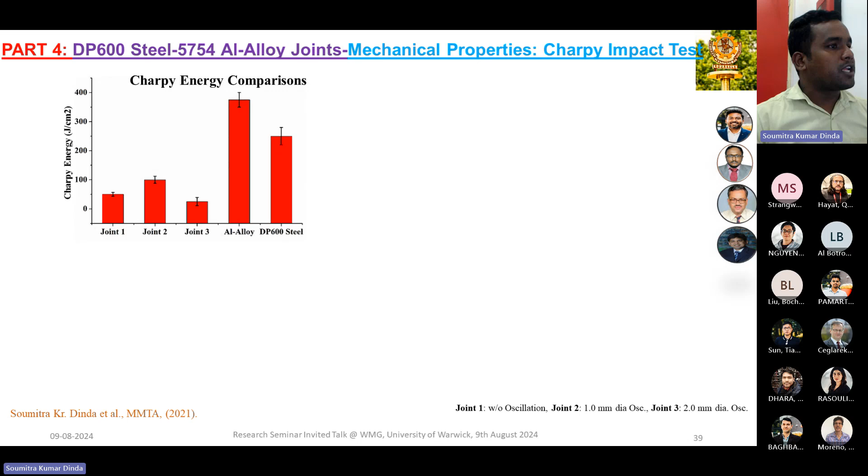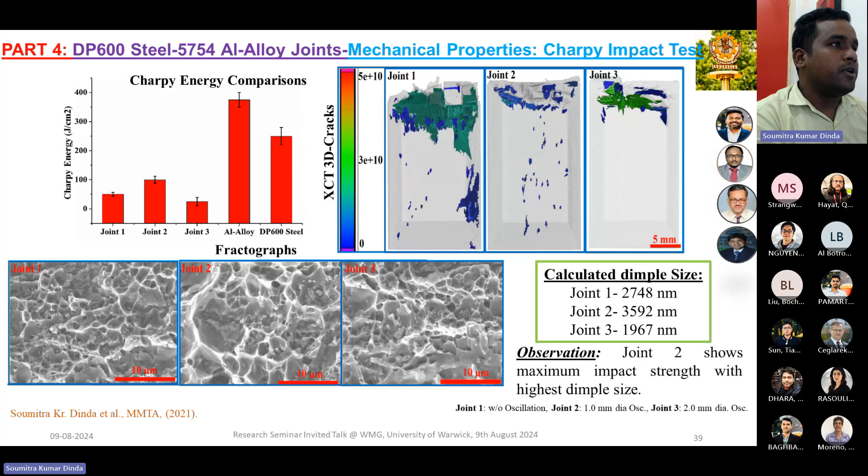Then we did the impact study using the Charpy impact test. Again we get a similar trend, that joint 2 gives the best or maximum energy. We did the fractograph analysis again, calculated the dimple size, and did tomography study to observe the crack nature formed due to the Charpy impact experiment.

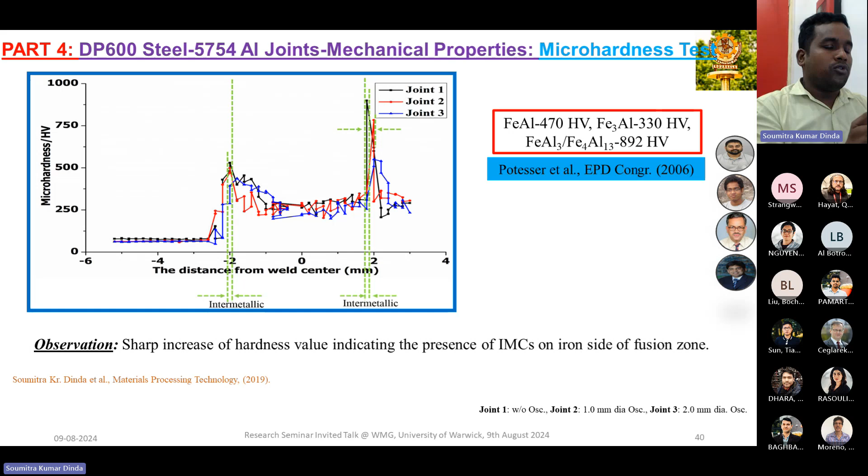And then we did the micro hardness, and it's clearly visible the formation of intermetallics with a sudden increase of the hardness value in both the HAZ region, HAZ to weld region, and the formation of intermetallic compounds.

Now we did the microtexture by EBSD, and we know that aluminum is FCC in nature, and in case of FCC crystal structure, there are 5 types of fiber components formed: cube, copper, brass, S, and Goss.

But all these different fiber components are controlled by different things. So the cube fiber component is controlling the recrystallization texture, whereas copper, brass, and S are the deformation texture, and Goss contributes in both ways.

But from our results, we see that the major components, also for joint 2, the major orientations are 111, 112, and 634 directions. That is for the deformation texture. That means, before going to fracture, we will get the maximum mechanical property in case of joint 2.

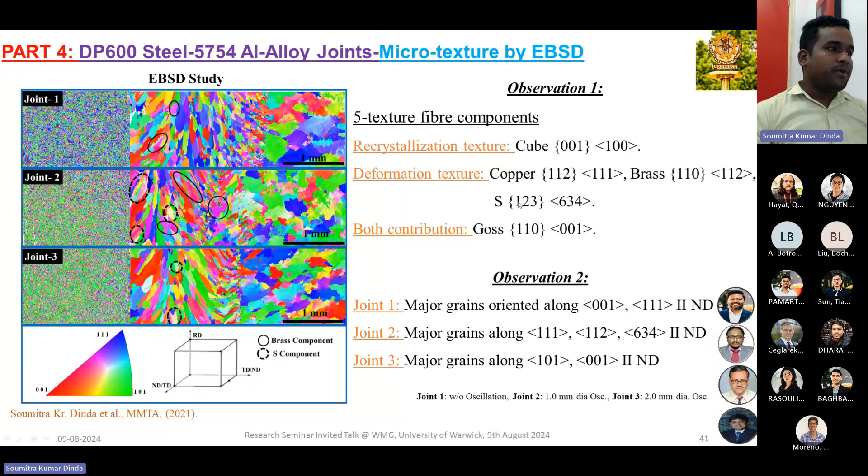So what is happening then in case of joint 2 and joint 3? Because both cases use oscillating beam, right? But this one is 1 millimeter and the third one is 2 millimeter. So when we increase the oscillation diameter, there may be a chance that it exceeds the limiting overlapping factor or limiting overlapping area.

That may be from 1 to, if we choose say 1.5 or 1.75 millimeter diameter, then maybe we get more superior properties, but 2 millimeter exceeds the limiting factor or limiting value of the overlapping. That is the reason why in case of joint 3 we get worse mechanical properties, or say very high welding defects, compared to joint 1 or joint 2.

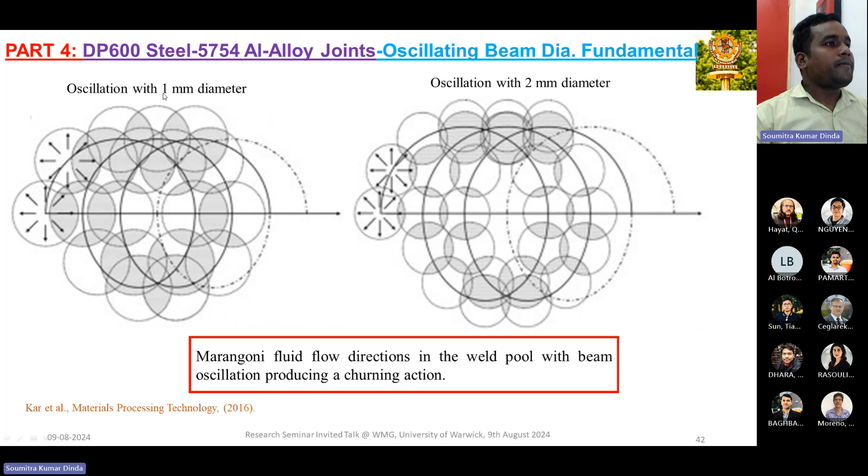And we also calculated this in terms of actual heat input, calculated by the back radius and the normal radius when we are moving or rotating our welding beam under beam oscillation condition.

And this is the point. What will be the point? Point 2 is the repeated melting and solidification, which gives more time for gas to escape from our material.

And the third point may be the churning action phenomena. The churning action of the weld pool during beam oscillation leads to more homogenization, or say reduces the elemental segregation, supersaturation, or intermetallic formation.

But if intermetallics form, how do they grow? I missed one slide. That intermetallic formation grows according to the Arrhenius type of equation. So if we increase the temperature, the intermetallic thickness will increase. But by using the oscillating beam, we are decreasing the peak temperature and decreasing the cooling rate.

That means we are decreasing the intermetallic growth phenomena. So that's why we are getting smaller intermetallics, or say very less in quantity, in the optimized condition.

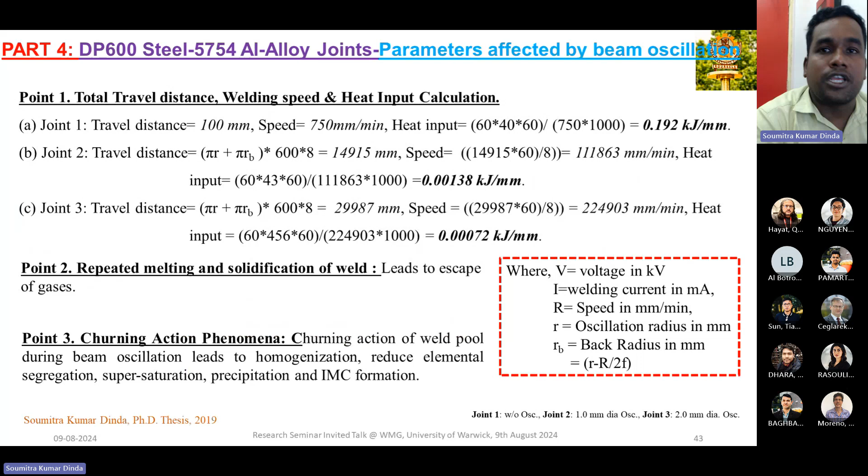So this is the conclusion. In one or two sentences: oscillating beam, or beam oscillation at optimum condition, will give superior mechanical properties, and that can be discussed with the help of defect study and microstructural study by controlling the intermetallics. But if we go beyond our optimum condition, we will get inferior properties.

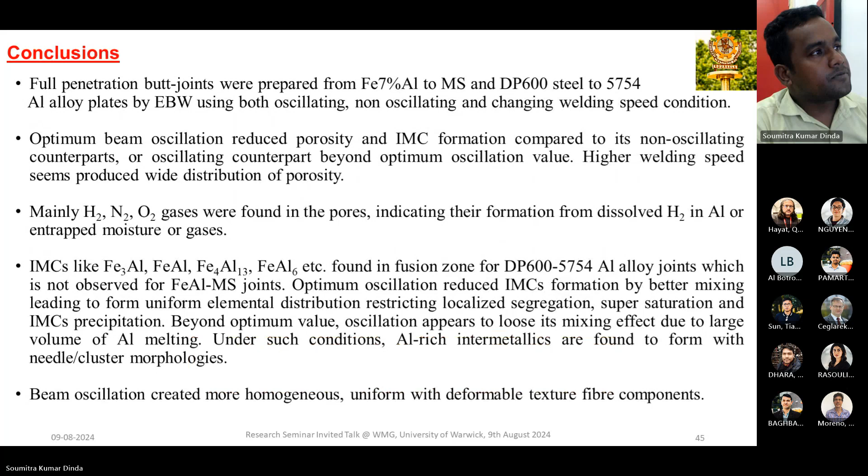Regarding right now, because I have recently joined, just last 1 year, I am doing some research work with some professors. One is from University of Tokyo — we submitted a proposal on AI/ML for BOF, that is basic oxygen furnace, a prediction study, with Hiroyuki Matsuura, Professor Derek, and Professor Pascal. We already signed a CTT proposal and the MOU is in progress. We also submitted a proposal to the Indian government, the SPARC proposal, so that I can visit WMG for 5 to 6 months to do some research or start collaborating.